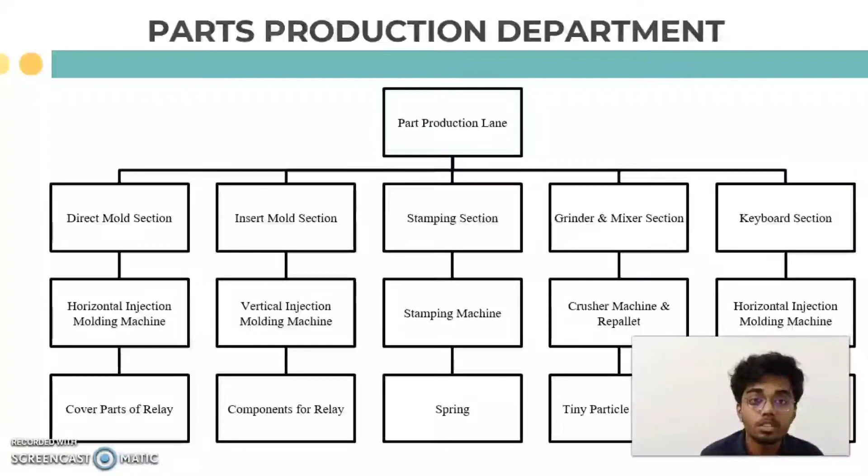The keyboard section has a horizontal injection molding machine, which manufactures the keytop.

These are the activities I've done weekly. I will always clean the air vacuum, which is used to clean shoes before entering the part production section. Next, I will check the hydraulic oil level. After that, I will test out the servo packs that were serviced by the vendors.

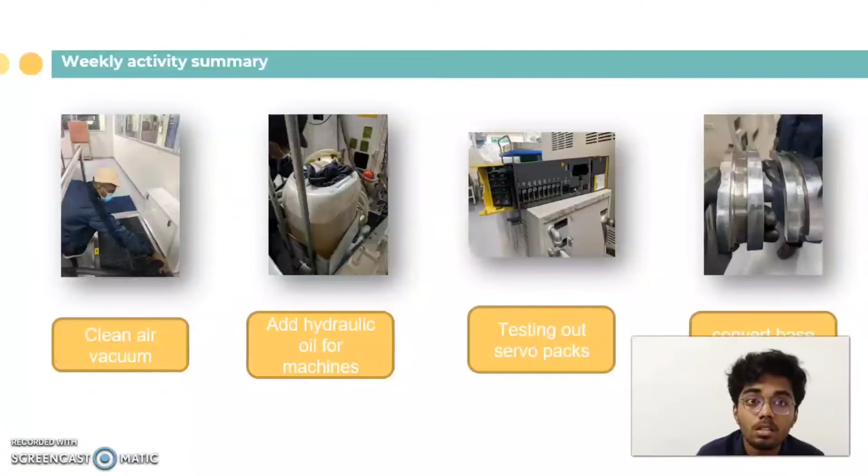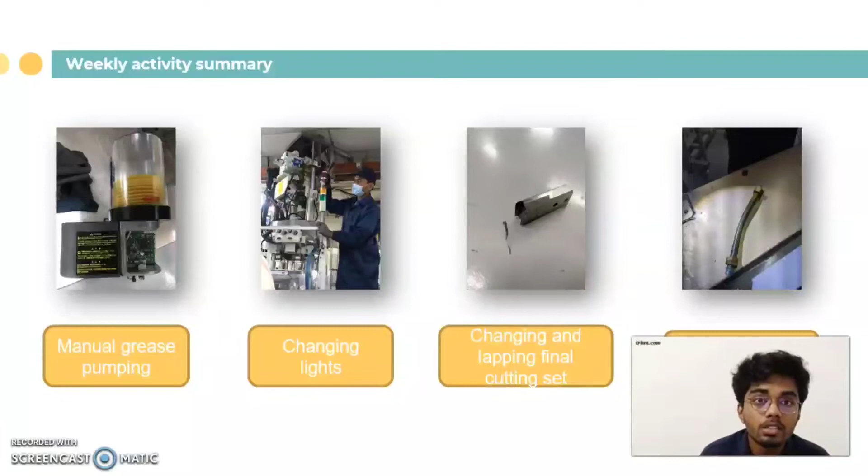If there is a request to change the size of the base mold, I will convert the base mold to P3, P4, or P5 base molds. Next, I will do manual grease pumping, then change the light at the indicator of the machine. After that, I will change and lap the cutting set. Lastly, I will change the hose that has leaked at the machine.

Activity explanation, Activity 1: Service screw, barrel and nozzle is an activity that needs to be conducted once every 2 months. This servicing activity is done to ensure that the machine runs efficiently, as it will affect the production quality.

Procedures: Make sure the machine stops running. Second, do the purging process by inserting ASACLEAN. This step is mandatory to clean all the remaining and excess material in the machine injection. During this step, the machine needs to be heated up first in order to melt down the solid ASACLEAN.

Thirdly, increase the heater temperature to dismantle the screw injection and nozzle. The increasing temperature will let the metal expand and facilitate the worker to dismantle the machine units. Fourthly, we bring the screw to the workshop and clamp it down with a G-clamp for the cleaning process.

Fifth, heat up the torpedo before dismantling it from the screw. The ASACLEAN attached to the screw will be removed using a steel wire brush.

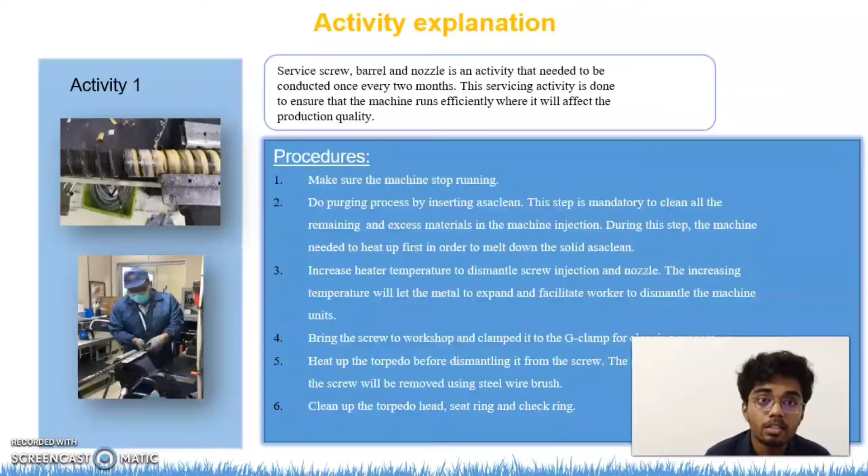Sixth, clean up the torpedo head, seat ring and check ring. Seventh, drill the nozzle with drilling tools to remove the excess material or ASACLEAN stuck in it.

Eighth, attach the torpedo head back to the screw injection. Ninth, measure the size of the screw injection in the torpedo head. This step ensures the diameter follows the specification after the cleaning process.

If it does not pass the specification, the screw and the tip will be changed. Then reinstall the clean screw, nozzle and torpedo set to the machine, and lastly switch on the heater before using the machine.

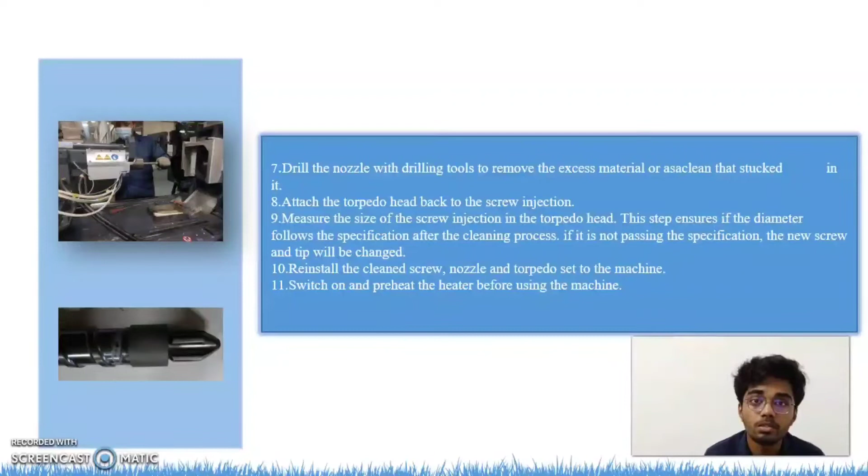Activity 2. Firstly, stop the molding machine operation and turn on the heater. Secondly, heat up the heater temperature on the Z4 zone to plus 30 degrees Celsius from the original heating reading.

Thirdly, open the cylinder tie bar to remove the rear injection unit. Fourthly, turn off the nozzle heater and remove the heater from the nozzle. Fifth, loosen and remove the nozzle using a size 41 spanner. Sixth, open the screw coupling and remove the screw from the barrel.

Seventh, heat up the torpedo before dismantling it from the screw. The ASACLEAN attached to the screw will be removed using a wire brush. Eighth, service the screw barrel, check ring, torpedo head, screw and nozzle.

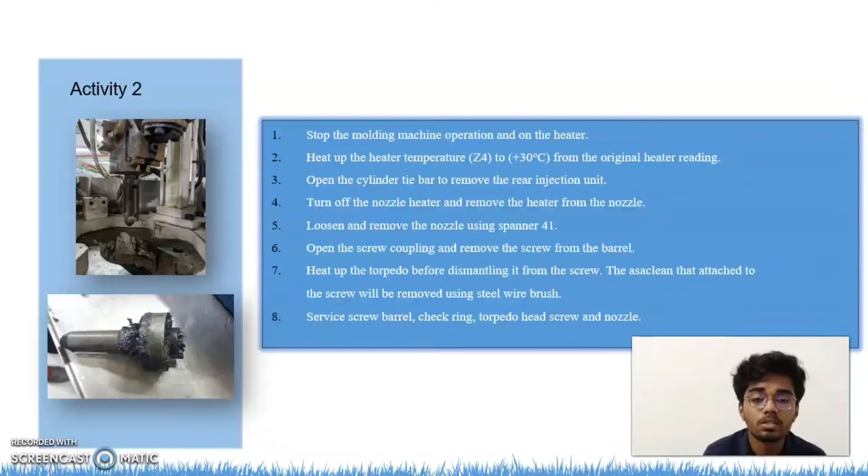Ninth, measure the dimension of the screw and check ring. This step ensures the diameter follows the specification after the cleaning process. If it does not pass the specification, the screw and the tip will be changed.

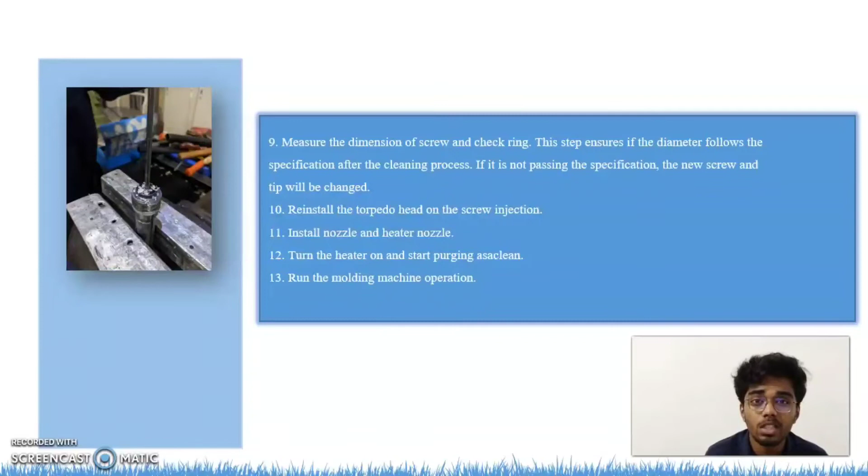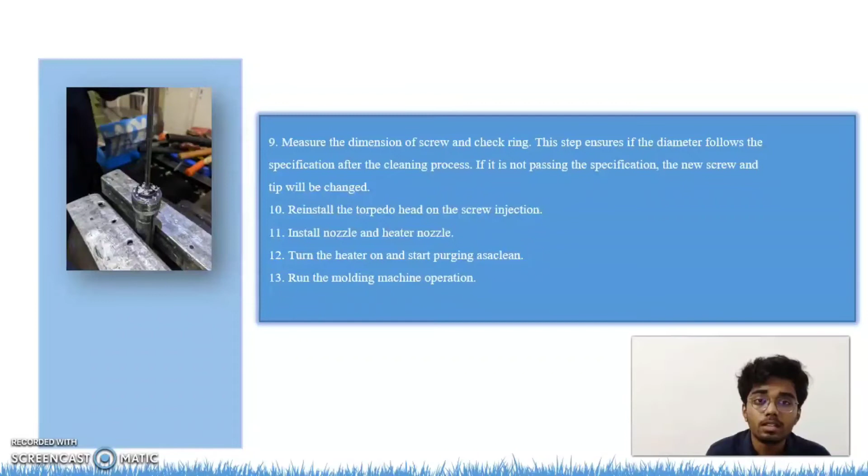Reinstall the torpedo head on the screw injection, install the nozzle and the heater nozzle, turn on the heater and start purging ASACLEAN. Lastly, run the molding machine operation.

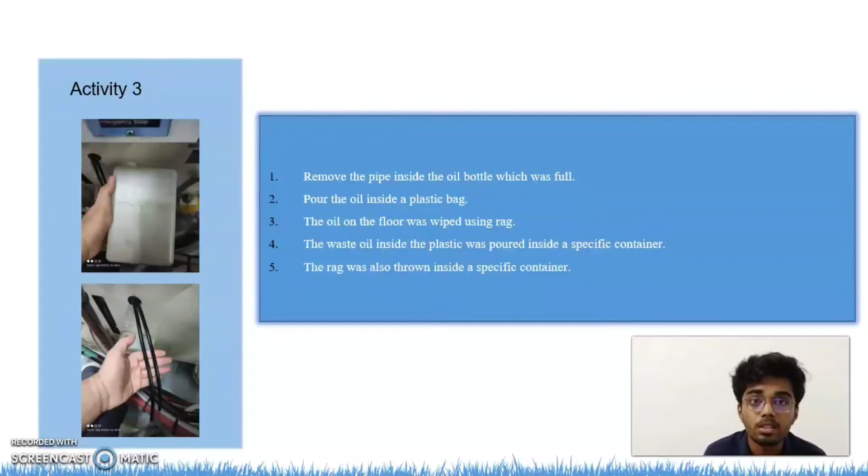Fourthly, the waste oil inside the plastic was poured inside a specific container. Fifthly, the rag was also thrown inside a specific container.

Activity 4: Open the front of the repallet machine with an Allen key. Secondly, remove the nozzle with a mallet. Thirdly, clamp down the nozzle before starting the cleaning process.

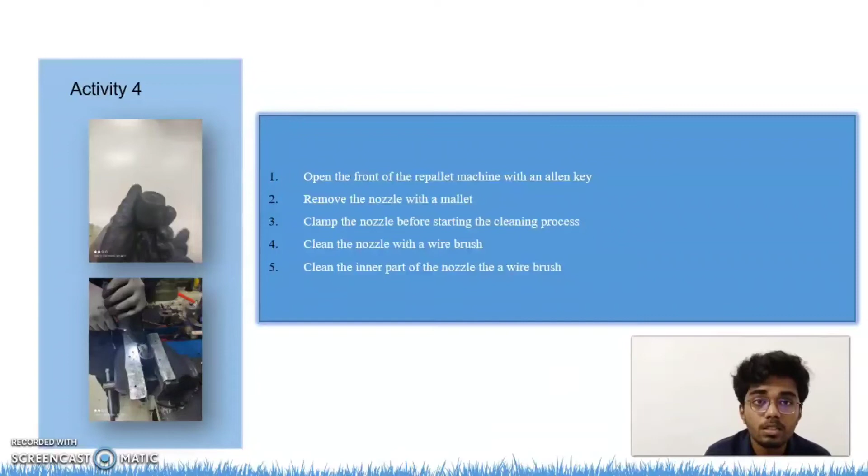Fourthly, clean the nozzle with a wire brush. Fifthly, clean the inner part of the nozzle with a wire brush.

Findings from industrial training: I have gained a lot of new experience and added knowledge, such as knowing the usage of relays. Secondly, I am able to improve equipment and machine skills.

I was taught how to do milling and drilling while doing my industrial training at Fujitsu Component Malaysia. Thirdly, I have gained questioning skills.

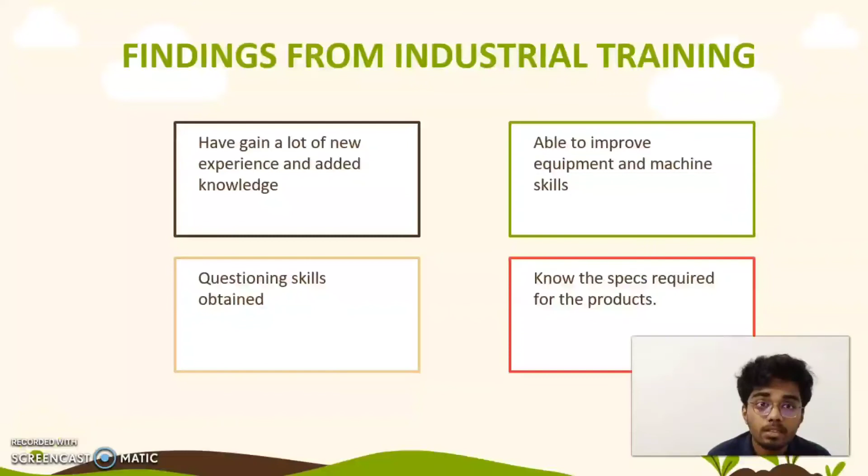I have the initiative to ask questions about the workings of the machine in a professional way. Lastly, I know the specs required for the products. I have been exposed to the specs because I have to check the dimension of the bobbin terminal.

For at least 6 months. Suggested improvement for Polytechnic: in my opinion, this industrial training course is too short. This will limit projects that can be undertaken by students, so Polytechnic should extend their industrial training.

Suggested improvement for industrial training is to try to make structured exercises for the trainees, so they are programmed to complete within the expected time given.

Improvement for the company: the company must know the real purpose of students undergoing industrial training. The company needs to hold an interview session so that it can know the background and abilities of the student.

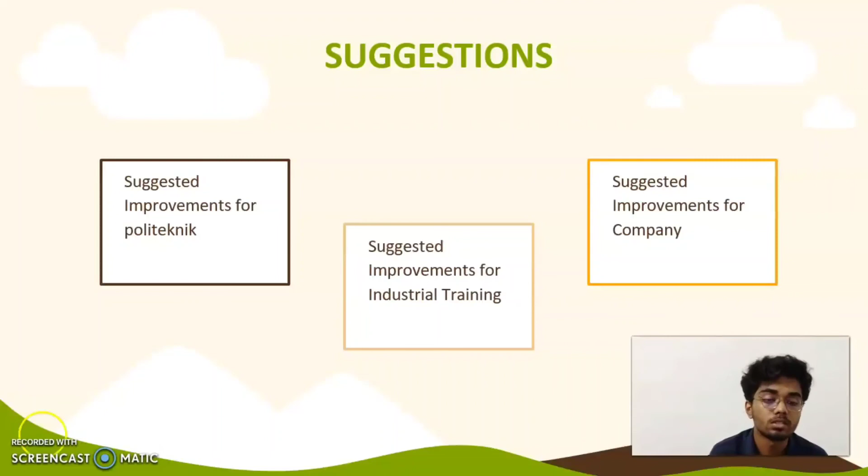In conclusion, I have gained a lot of new experience and added knowledge. Students are trained to become professional workers, not only in terms of personal appearance, but also trained in technical skills as well as in a manufacturing company.

The theories that I learned from the lecturers and books can also be applied during this industrial training program. Usage of each tool and equipment helped me understand better the techniques and ways to use it correctly. This new experience has increased the value of skills, which are limited to being learned.